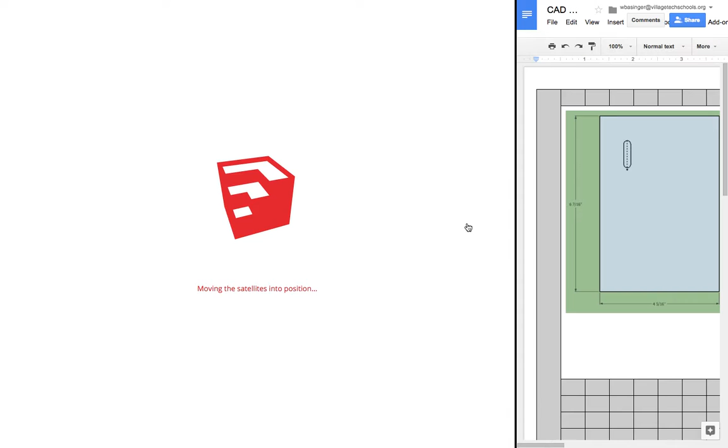So the first piece that I'm going to draw is pretty simple except for the cutout hole in the middle. I'm going to draw this one to begin with. It would be nice to have the paper copy right by where you are, but I'm just going to pull it up here on my screen and show it in split screen.

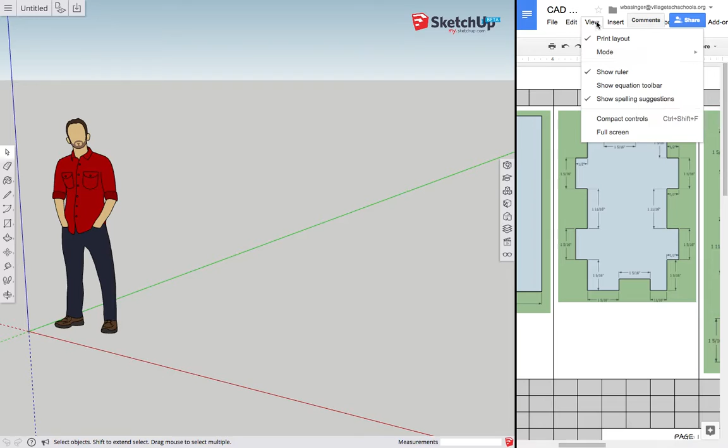I wonder if there's... yeah, that'll be nice. I can see the dimensions a little bit better if I zoom in. Okay, so I've got the drawing that I want.

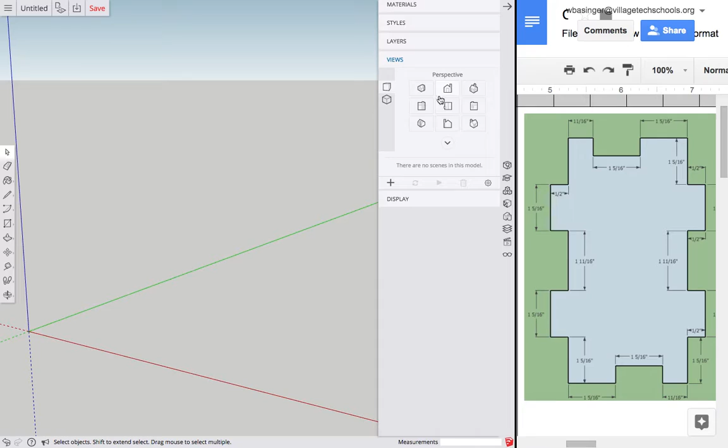I recommend drawing these in top views. So you're going to want to take the little man out if you haven't already. Then I'd recommend you go to switch to views, use your top view, and switch to parallel projection, just like that. Then you can hide that menu to get it out of your way.

Okay, so this first piece has lots and lots of little notches in it, but it's actually not very hard to draw. It's just all straight lines. So you're going to start with your straight line tool, and then you're going to start.

I recommend maybe not starting on the origin. You might lose your line on the green axis. So start right there, just any random spot, because this is your first line. If you look over here on my drawing, I am going to start with this corner right here.

So I'm going to start by drawing a line that's 1 5/16 inch high. To do that, I'm not going to just click randomly. I'm going to make sure my line is locked in on my green axis, and then I'm going to start typing the dimension that I want: 1 space 5 divided by 16.

Okay, and as you can see, it drew a very small line. That's because we're zoomed way out. So I'm going to go ahead and zoom in so that I can see that. Okay, good. Now I've drawn this right here.

I want to draw out for my notch. And if the dimension is not specified, it's going to be 1/2 inch. So I'm going to go this way: 1 divided by 2. That gives me 1/2 inch.

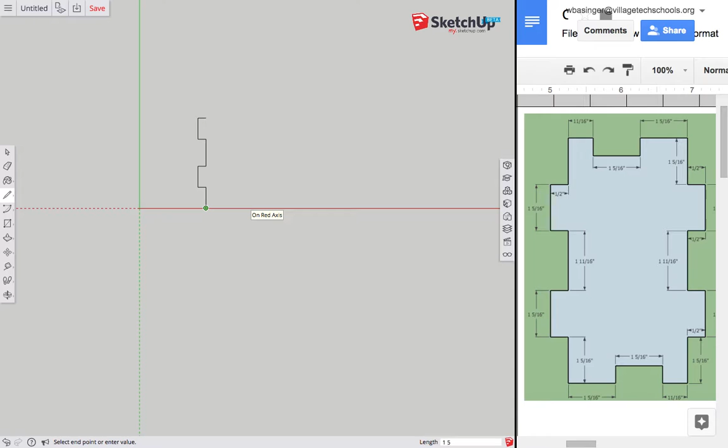I'm going to go 1 5/16 right there. Then I'm going to go up 1/2 inch. I'm going to go over 1 5/16. I'm going to go down 1/2 inch. I'm going to go over 11/16.

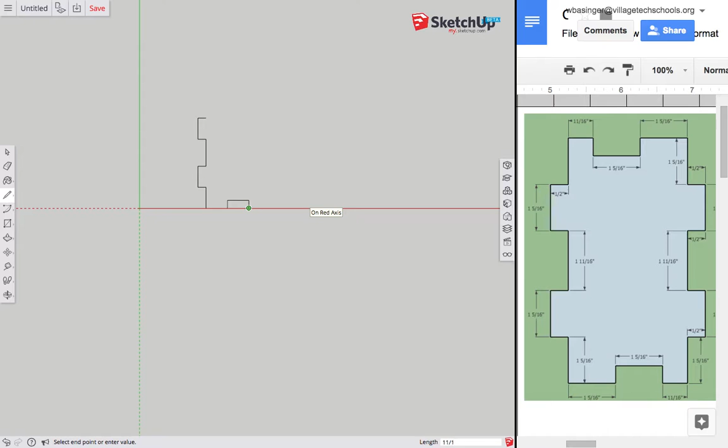Then I'm going to go up 1 5/16. And then I'm going to go over 1/2 inch. Then it looks like I've slightly cut this off right here. That is 1 5/16. So 1 5/16, cut back in 1/2 inch, go up 1 11/16.

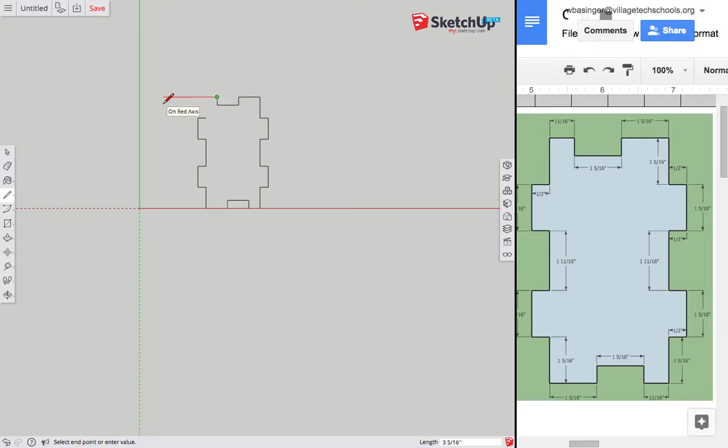And then back 1/2 inch. And then I'm right here. So I'm going to go ahead and go up 1 5/16 inch. And then I'm going to cut back 1/2 inch. I'm going to go up 1 5/16. I'm going to go over 1 5/16. I'm going to go down 1/2 inch, over 1 5/16, up 1/2 inch, over 11/16. I'm right here at this point.

And then I'm going to connect back. Now here's a way I can check my work. This space right here from here to here should be the same as this to this, which is 1 5/16. So I'm just going to use my tape measure to verify. And if you look down here, it came out perfectly. So I've got my first component.

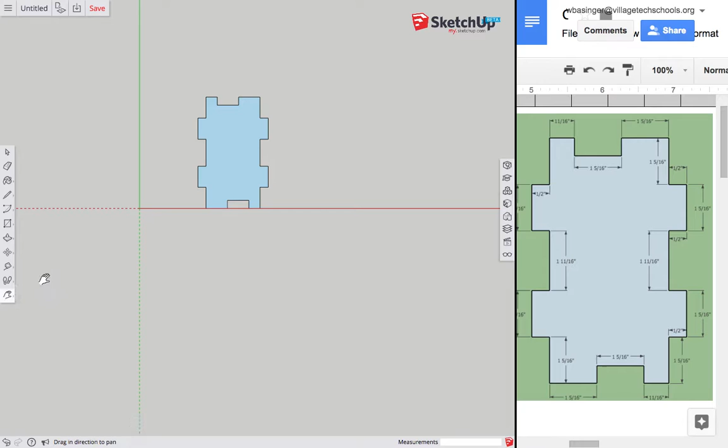Awesome. Okay, if you feel like you've got it, go ahead and start drawing. I am going to show you how I would do one of the angled pieces. So let me pan over, get a good little zoom on this, and I am going to show you perhaps one of the angled pieces.

So here's a good piece to start with. Okay, so I know I'm going to start somewhere up here because my piece is going to reach downward. So I'll start right here, and I'll start by drawing a line that's 4 and 5 divided by 16. I don't think I put that in right if you saw me type it in wrong. 4 and 5 divided by 16. Okay, then it says to go down 5 1/4 inch. So I'm going to go down 5 and 1 divided by 4.

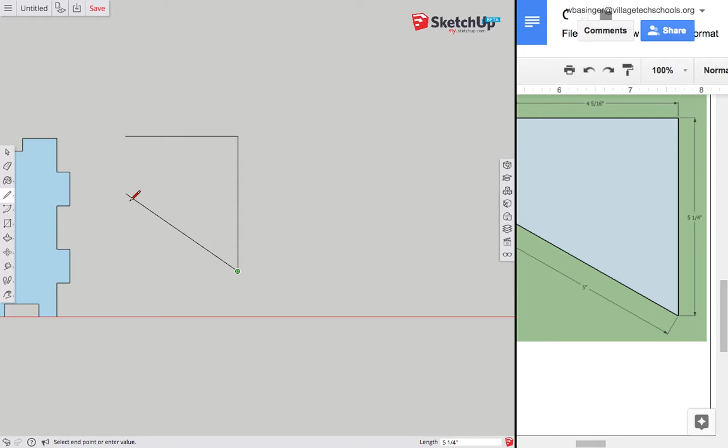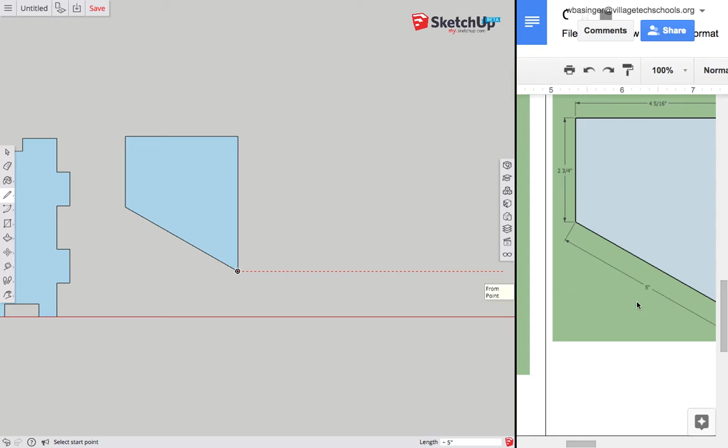Then I could guess and try to get the angle right, but I don't think that would be a good idea. I think instead it would be better to draw the line that I know, 2 3/4. So I'm going to draw that one, 2 and 3 divided by 4. Now I can connect it back, and now I've got the nice little angle that I was looking for from that piece. Okay, I hope that makes sense. And that's really all you need to do.

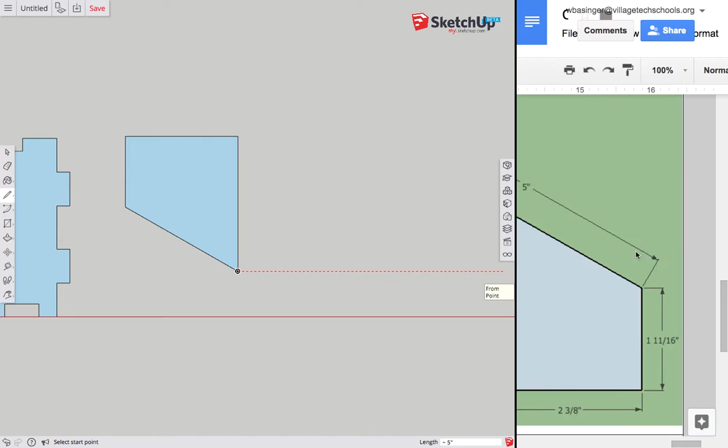This one right here will be a little bit tricky with the in-cut angles. I can help you work through that when you get to that one. This one is pretty simple. I don't see that should be hard.

The circles, let me show you how I do that. It's really not hard. So you start by going 1 inch this way, go 1 inch this way, 1 inch this way, and then connect it back to make a perfect square.

Okay, the circle would be the most challenging part, but it tells you the offsets that you need to have. So what I would do is I would make several guidelines here. The first I would do is just find the very center of the line. So just do some 1/2 inch just to find the very center of the circle.

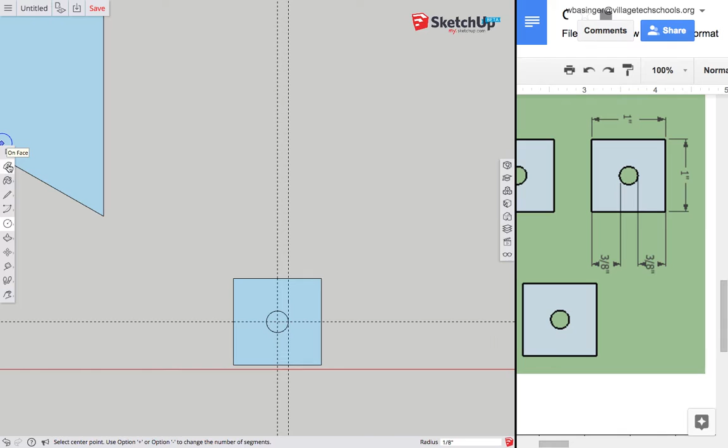Then you just need to do one more. You need to go 3 divided by 8, and that gives you the distance from this edge to the outside diameter. And then you just change this to the circle tool. Start your circle there, make sure it's there, and that should be good to go. You can delete your guides, and you can cut out the piece in the middle, and that should work. Okay, if you have any other questions, let me know.

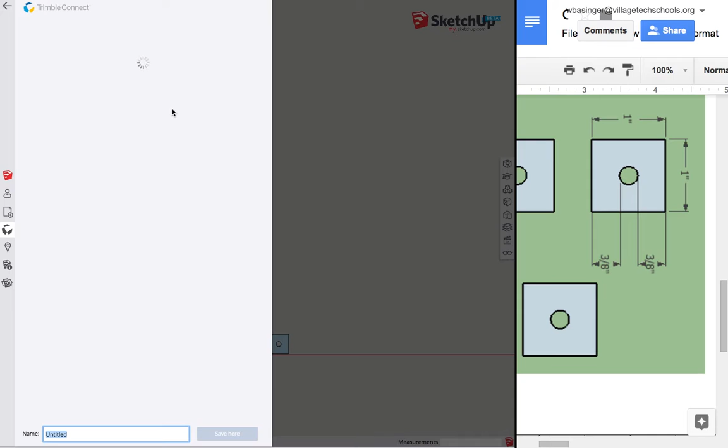It is important for you to save your work, so I'm going to show you how I do that. Go up here to save. If you're already signed in, it should give you an option to double click on SketchUp, name your project. So we'll call this Unabox, and now it is saved.

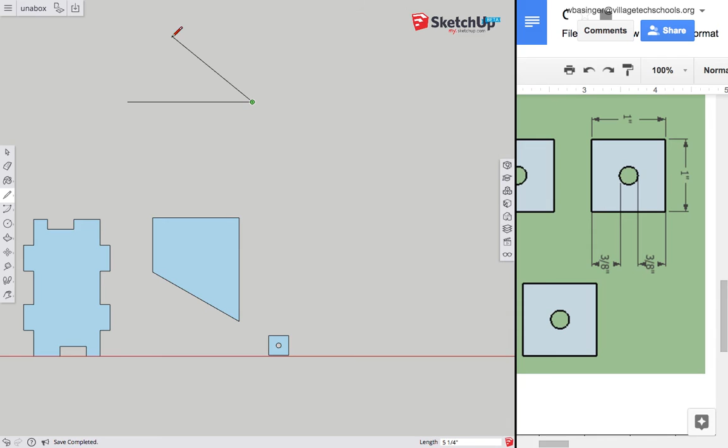Now every time I make a change, it will give me an option to save my most recent progress. I would recommend that you save frequently because you never know what could happen. Your battery could die, and you would definitely want your progress to be saved. Let me know if you have any issues. I hope this is a fun assignment for you guys.